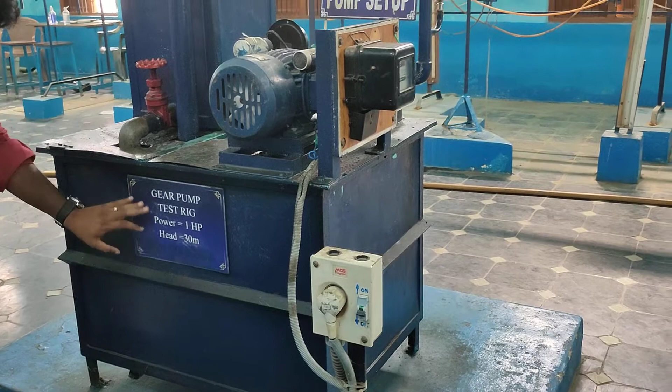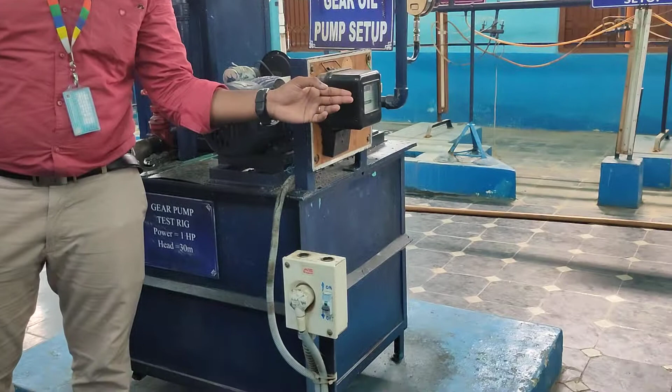So see here, they gave the specification of the gear oil pump, power, head and all. So this is the main tank. The tank will be filled with SAE oil. Initially the tank will be consisting of oil, then this is called the collecting tank, where we can collect the oil and use it for calculation purposes. Next, this is the motor, this is the main switch, and this is for noting down the time taken.

So in the collecting tank, what kind of oil will be collected? It's SAE 40. Just here, grade SAE 40, 882 kg per meter cube. This is the collecting tank capacity. Initially we will be having the suction line. This is the main tank. From this tank we will be collecting the oil.

With the help of suction, here we will be having two gears. The gear which we use is a spur gear. One will be rotating clockwise and another one anti-clockwise. In between them there will be interference. Both the rotating gears develop a liquid seal in between. Because of this, the oil is pumped from the inlet with the help of the rotation of the gears. Due to this rotation only, the oil is sucked.

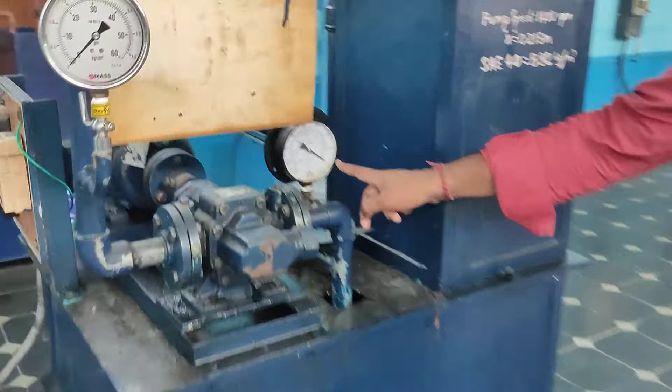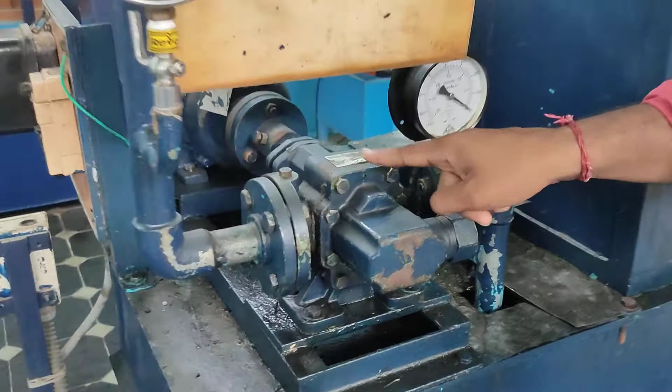And this is the suction line. Here we will be having a vacuum gauge. The vacuum gauge won't deflect; we will be having a constant value. When we start running the experiment, we can note down the values. Inside this casing, we will be having two spur gears, and this is the best example of a positive displacement pump. And this line is called the discharge line or discharge pipe.

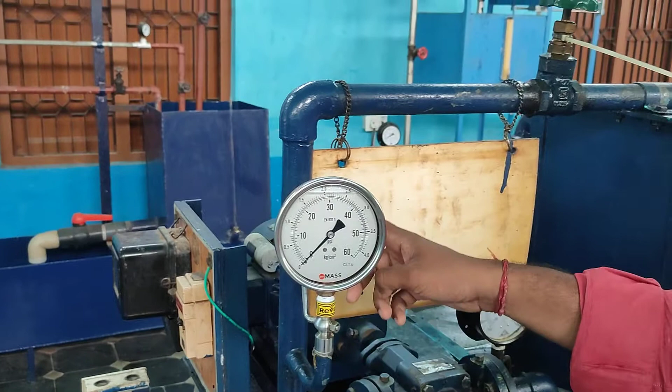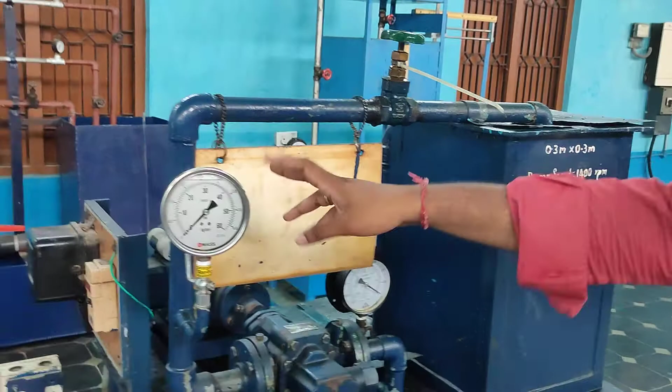Here we will be having a pressure gauge, and the pressure is controlled with the help of the gate valve. By rotating clockwise or anti-clockwise, we can control the pressure. Once we set the pressure, the oil will keep collecting in this tank. Initially we will be having the drain. If the valve is open, the oil will be sent to the main tank itself. If we close that valve, the oil will start collecting in this tank. For a height of 10 centimeters, we will note down the time taken for the oil to collect in the collecting tank.

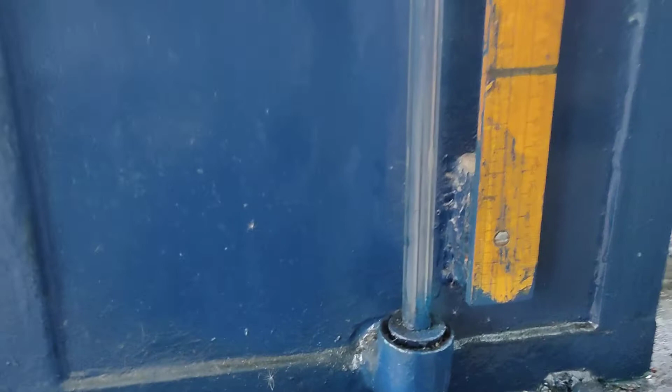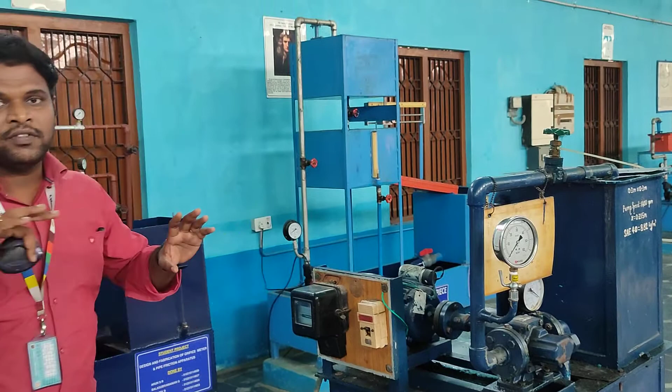So this is the main. You have to switch on this main, and then press this switch so that the pump starts working. The reason for telling now is because once the pump is working, the sound will be very loud, so whatever I explain won't reach you. That's why I'm telling the procedure now.

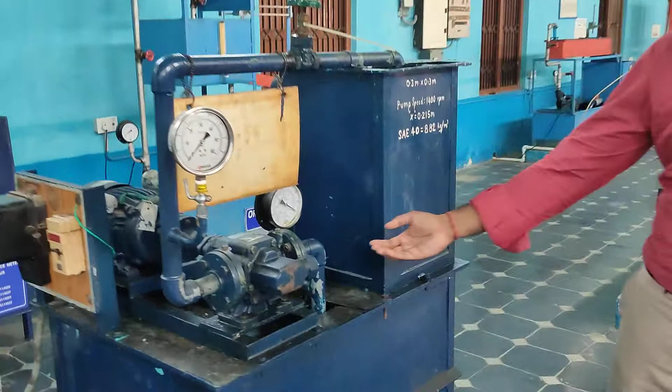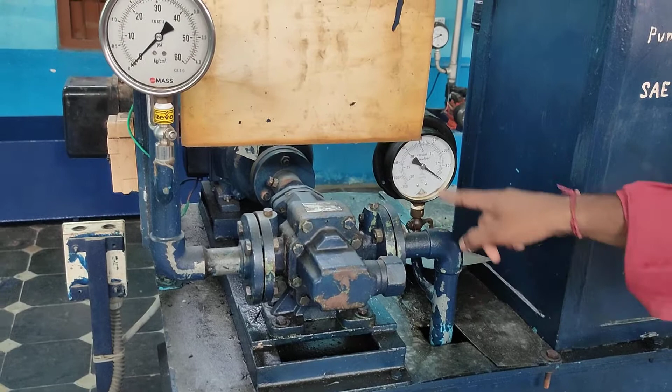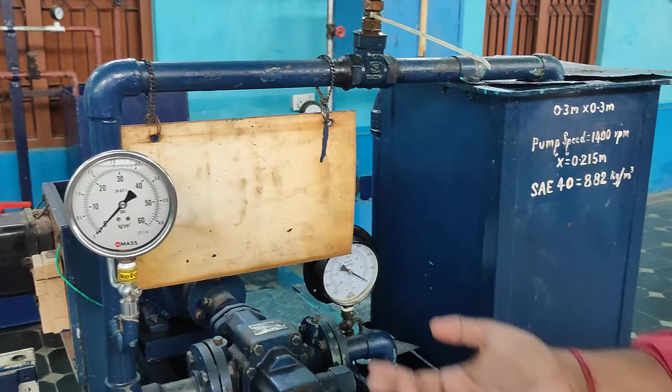Once the motor starts running, the oil comes from the suction line. This is the suction line, and here is the vacuum gauge. The oil will be sucked up into this pipeline. Here we can note down the reading, and here is the pressure gauge. We can turn this gate valve to increase the pressure slightly for different readings, but the vacuum gauge reading will be constant. And then the oil will be coming back to this tank.

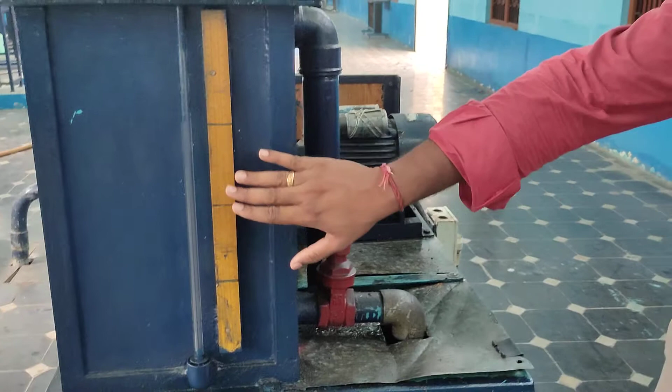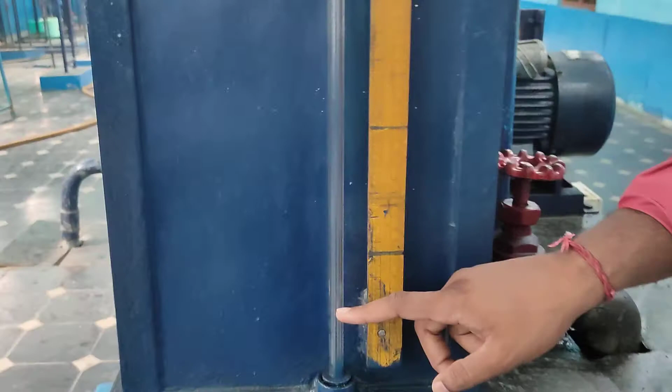Now the valve is completely open. If I close the valve like this, clockwise means closed, anti-clockwise means open. Now I have closed the valve, so automatically the oil will start collecting in this collecting tank, gradually rising up. For a height of 10 centimeters, we need to note down the time taken with the help of the stopwatch.

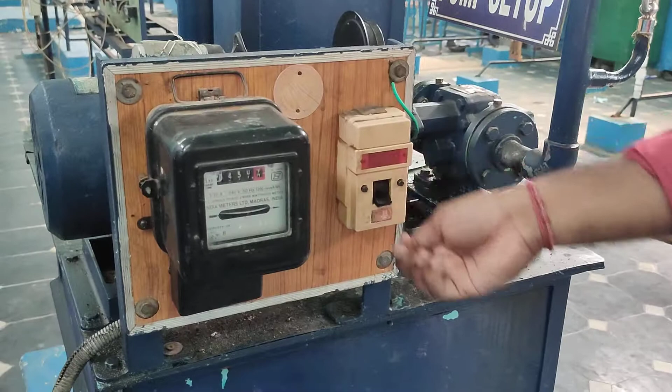Next, here we will be having the energy meter. For five revolutions, we have to note down the time taken. Now everything is in off setup. Once we switch on, the same procedure we have to follow. This is the main; you have to switch it on. Next, here we have a switch; turn it so that the motor starts running. See, now the motor is working.

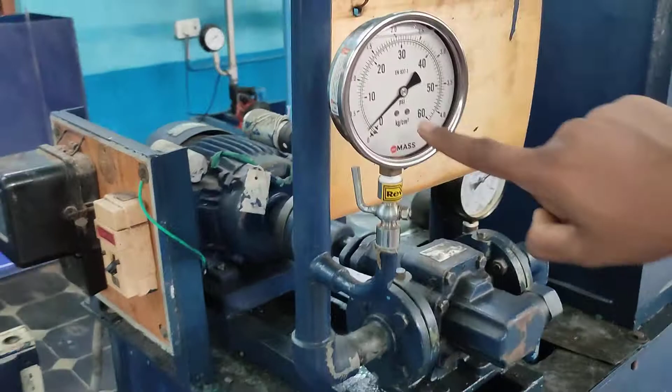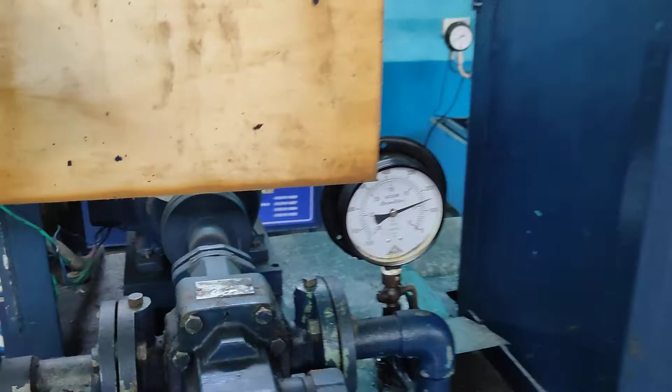The pressure gauge is set to 0. Now the pressure gauge is set to 0. See here, and we will be having the vacuum. Just note the vacuum gauge reading. So here will be the vacuum gauge reading. So now what happens is the oil is sucked in to the suction line. It will be coming to the delivery line.

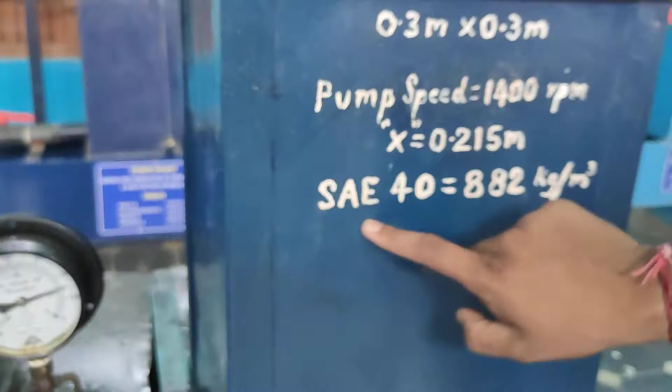See here, this is called the collecting tank. It will be collected up here, and the oil we use is SAE oil. Now the drain pipe is open, so automatically all the oil will be sent back to the main tank itself. If we increase the pressure of the pressure gauge.

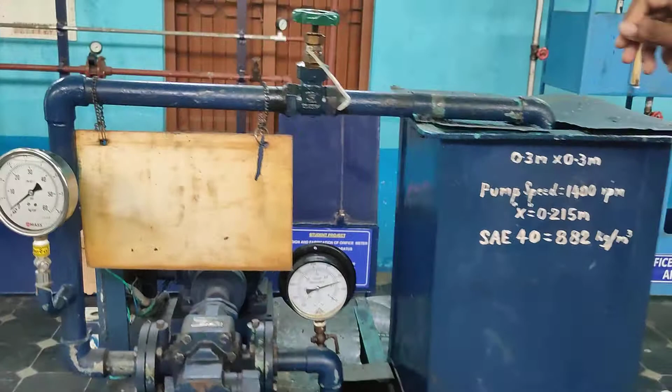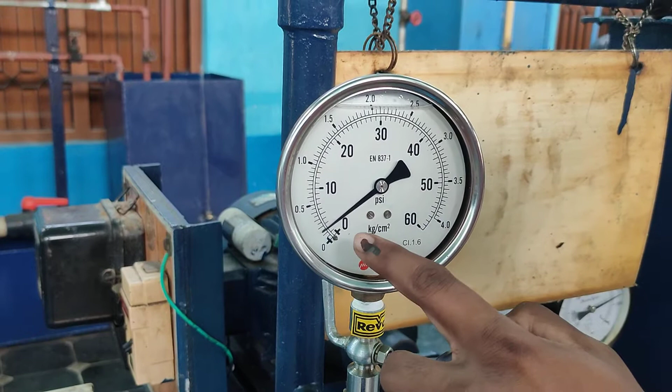Start. Now I already set the reading for 0.2. If we turn in clockwise direction, just note the dial gauge. It will be increasing to 0.2. See, the needle is moving up. Just note down, needle is moving up. So 0.2 I have set the pressure gauge, and note down the vacuum gauge reading.

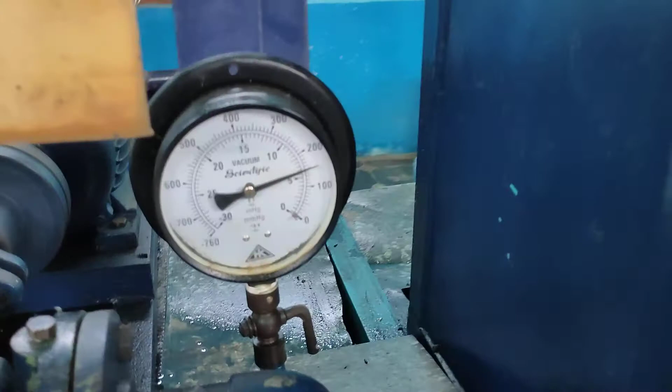Okay, and simultaneously you have to note down the energy meter reading also, with the help of the stopwatch for five revolutions. See here, the energy meter is working. With the help of the stopwatch, you have to note down for five revolutions how much time is taken.

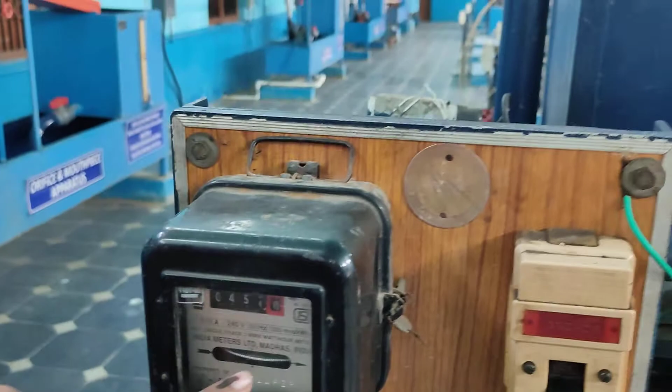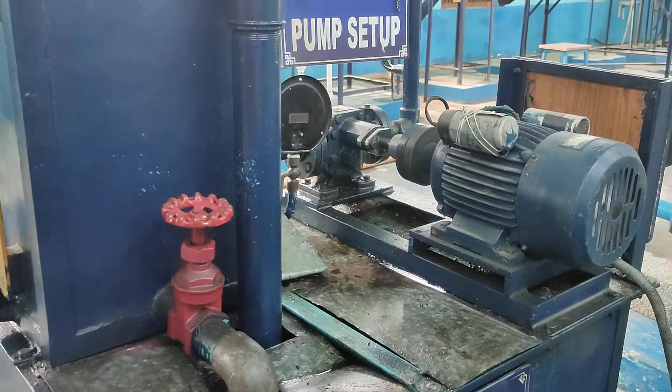Now the valve is completely open. So automatically all the oil will be sent to the main tank itself. If you try to close it, see here what happens. Oil starts rising up.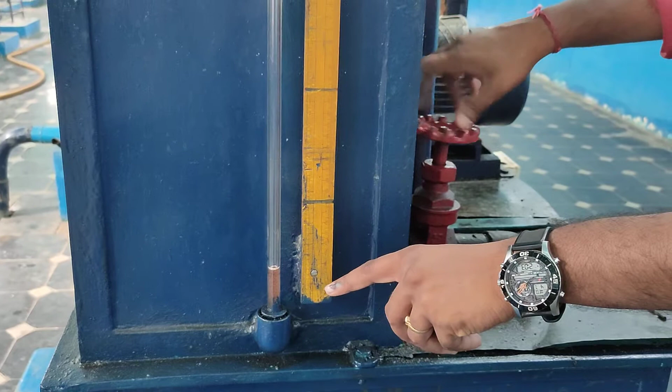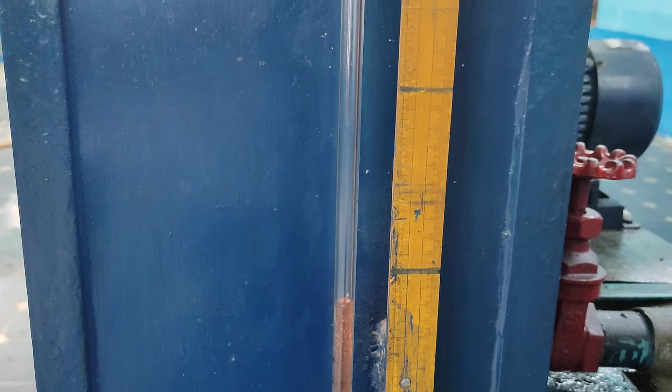See here, the oil is moving up, and you have to note down for 10 centimeters. For 10 centimeter height, how much time is taken? You have to note it down. Now just open the valve, so that all the oil will be dropping down. It will be going back to the main tank itself.

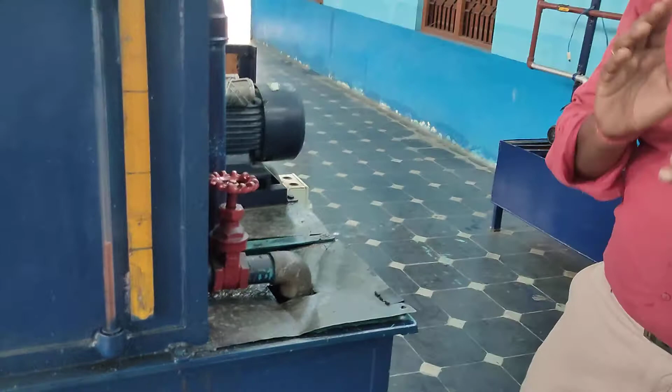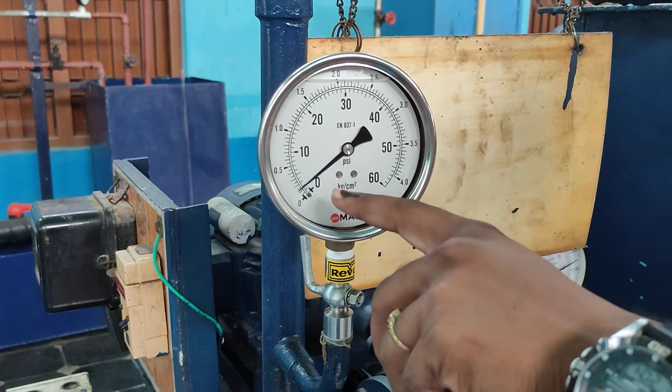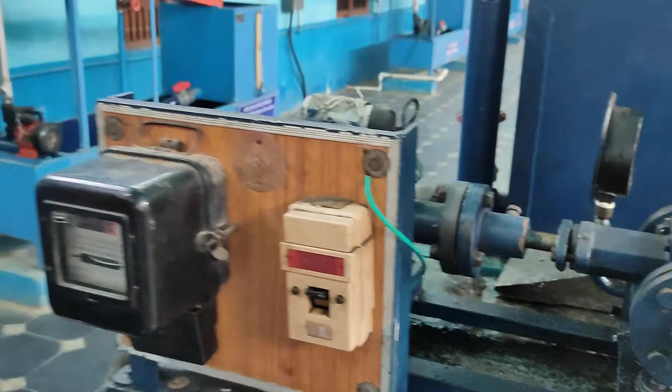Whatever you did, the same procedure you have to repeat for the remaining 4 or 5 readings. For closing this experiment, you have to reduce the pressure to 0. Before that, you should not switch off the motor. Bring the pressure to 0. So after bringing the pressure to 0, now we can switch off the motor. See here, switch off the motor, and then you have to switch off the main.

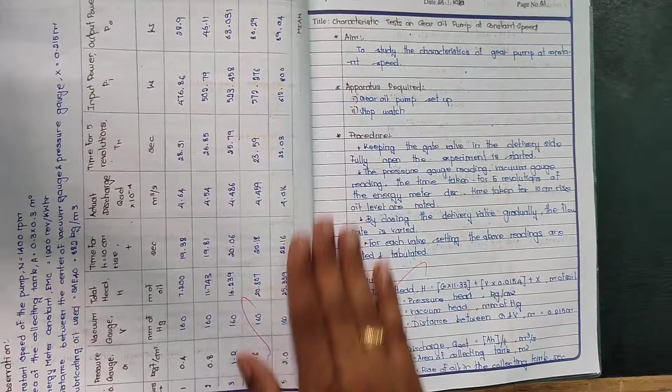Now we have seen how to do the experiment of a gear oil pump. Now I will tell how to do the calculation. So this is the tabular column part, and here we will be having a specification. Just see, constant speed of the pump, area of the collecting tank, energy meter constant, and the distance between the center of the vacuum gauge and pressure gauge. Lubricating oil used is SAE 40 as I mentioned.

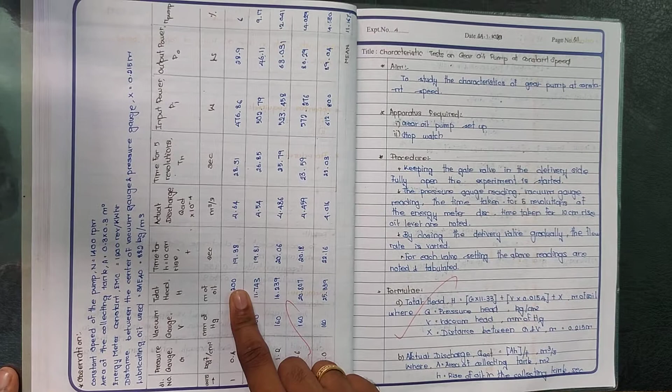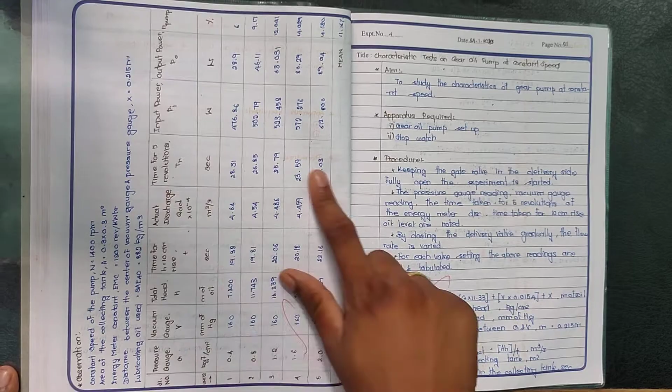So this is the tabular column. Here we have to note the pressure gauge value, here vacuum gauge value. Vacuum gauge value is constant 160 as I said before. Total head we need to calculate with the help of the formula. This is the time taken for the rise of the oil for a height of 10 centimeters. Actual discharge we need to calculate with the formula. This is the time taken from the energy meter. And this is the input power, output power, efficiency of the pump. All these we calculate with the formulas.

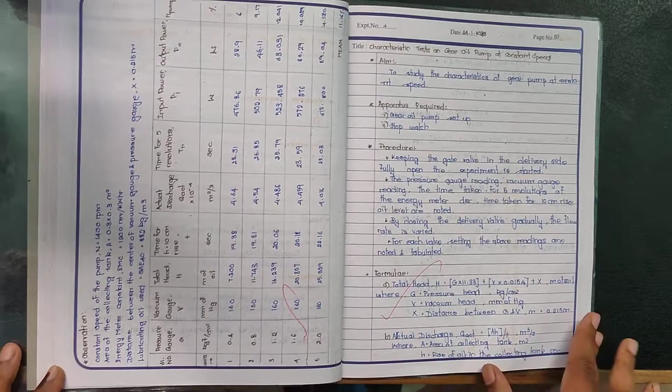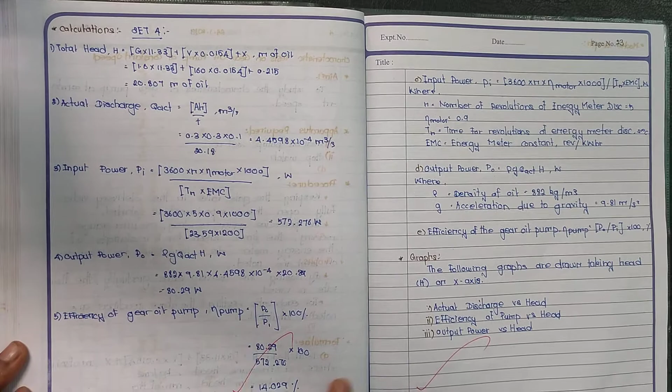All the formulas we have clearly given in the observation manual. Just see here, have a look at it. The total head, actual discharge, input power, output power, efficiency of the gear oil pump, all the formulas are there. Just substitute the values and calculate the remaining things. And in case you have any doubts, you can ask me.

And we need to plot a graph. The x-axis will be the head, and the y-axis will be output power, efficiency of the pump, and actual discharge. So once you plot it, you will be getting a graph like this.

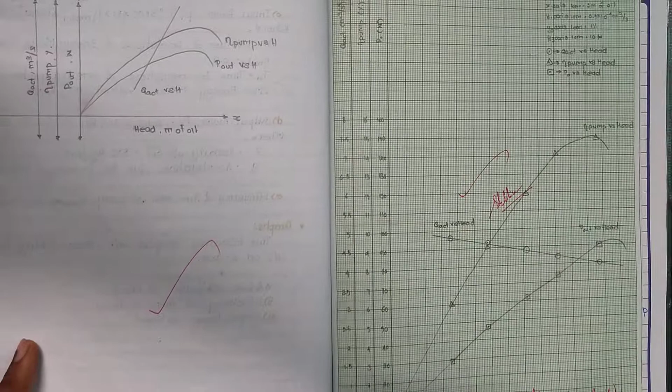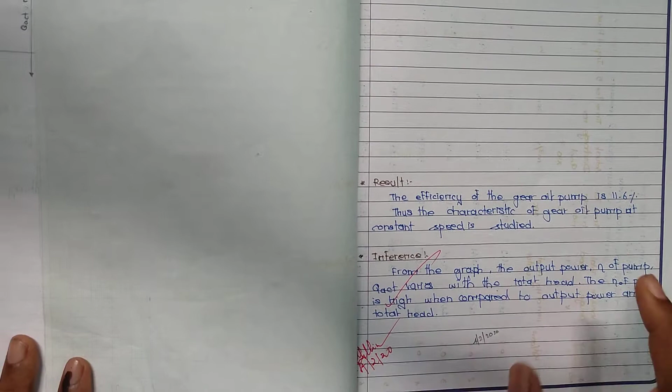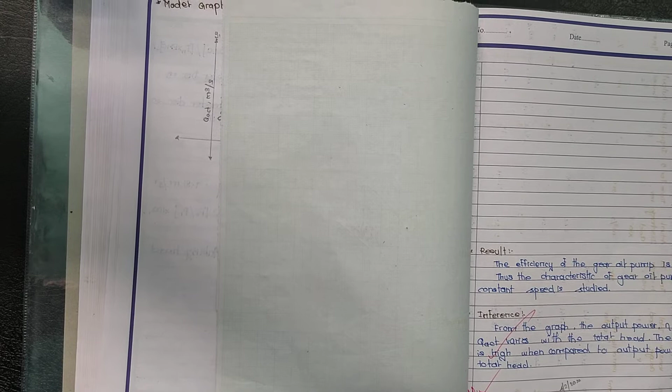Finally we have determined the efficiency of the gear oil pump. Approximately it will be 11.6%. And speed is constant, that is, the characteristics of the gear oil pump are studied. You have to remember this. And inference: just note down whatever values you are getting, interpret and write the inference. I hope it's very clear how to do the calculation. So we have seen the working of the gear oil pump and how we have to